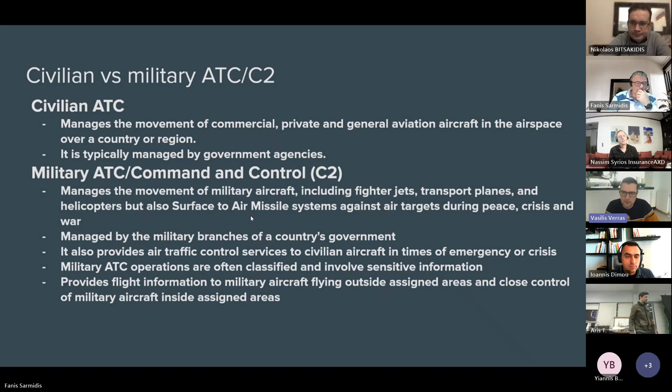When we had military aircraft under control on a frequency, our concern was that they fly safely to the assigned area to conduct the exercise, and that once fully under control, they do not violate the block altitudes they were assigned, nor the 2D borders of the area. So they didn't go out of the area, and they didn't approach military traffic in the vicinity. We were always giving them directions, bearing, range and distance to civilian traffic flying around, so they could establish radar contact with their own radars, or visual contact if possible.

Now, the flight phases. From the pushback of the aircraft from the gate of the airport, to parking at the next gate at the other airport that could be on the other side of the world, we have basically three phases and three types of controllers that control a flight.

We have the tower controller, which is the person that provides the service in the vicinity of an airport or aerodrome. The tower controller also controls the aircraft on the ground and until takeoff. Then the approach controller, or departure controller, is the person that provides air traffic control for departing and arriving flights. They are the link between the tower and the area controllers.

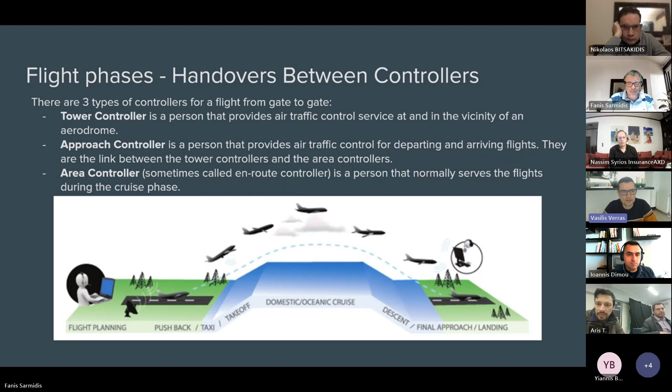So, ground systems — what do we use in ATC to actually communicate with the aircraft, to visualize their trajectory, to see where they are, and to see who they are?

Typically we have sensors: radars, primary radars, secondary radars, and other types of sensors able to detect an aircraft. We have two basic types: cooperative and non-cooperative. Cooperative types are like secondary surveillance radars, which interrogate an aircraft for a specific IFF-SIF mode. The IFF-SIF modes used by civilians are 3 Alpha, 3 Charlie, and Mode S. The IFF-SIF modes 1, 2, 4 and 5 are used by the military.

Then we have Automatic Dependent Surveillance Broadcast, or ADS-B for short, which is a system used by the aircraft. It's not like the IFF-SIF, where the radar needs to interrogate the target — it is a continuous transmission of data from the aircraft, where various information about the flight, like speed, heading, altitude, and position, plus settings like the selected altitude in the autopilot or even the vertical rate of the aircraft, are exchanged.

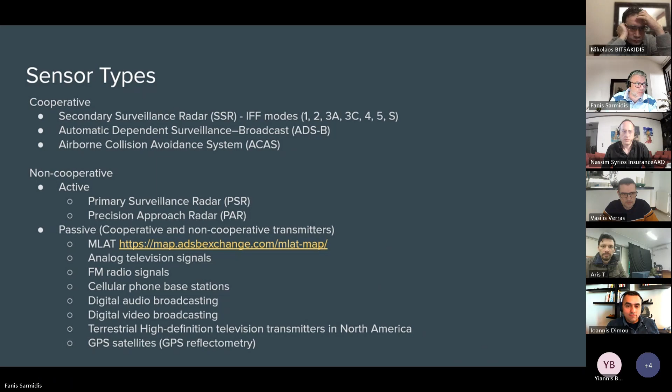So a little bit about the IFF. It works at the 1030 and 1090 megahertz frequencies. It is not a range, it uses these two specific frequencies. As I said before, for civilian usage, typically it contains mode 3 and mode Charlie. Also, it contains mode S.

We also have nowadays the IFF emergency codes that the pilot can set: 7500 for hijacking, 7600 for loss of communication, and 7700 for general emergency. We also have, though it's not very common, 7400, which is used for the loss of communication of drones.

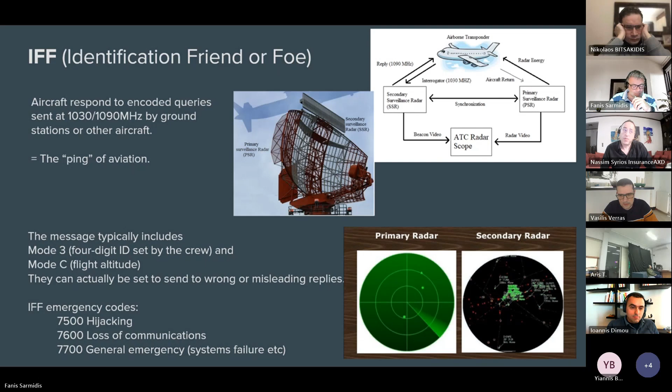So how do we create tracks, and what is a track and what is a plot? A plot is a target report that results from digital integration of the received echoes or replies inside the antenna beamwidth. Normally, when a radar scans the area, it gets back a signal from the aircraft, either the reflected signal from its own radar in the case of PSR, or the reply of the IFF SIF equipment of the aircraft in case of an IFF interrogation.

What is determined by the signal is the azimuth, the distance, and also the altitude if it is a 3D radar. This is basically what a plot is: a piece of information that contains the time of detection of a flying object with its azimuth, its range, and its altitude from the sensor. Of course it contains more information, especially on SSR replies, like the IFF SIF modes, mode S, and other information.

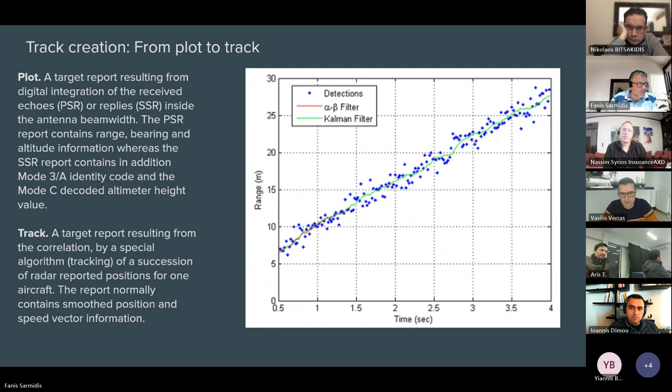Multilateration is a different technology. It's non-cooperative, and it calculates the time difference of arrival, basically of a signal from multiple sensors. Typically we need more than three sensors, four or more, to perform multilateration, and they need to be very well time synchronized.

For each detection there is an area of probability where the target is, based on the time of arrival. If you combine all these areas together, you get the common area which identifies the place where the aircraft is flying.

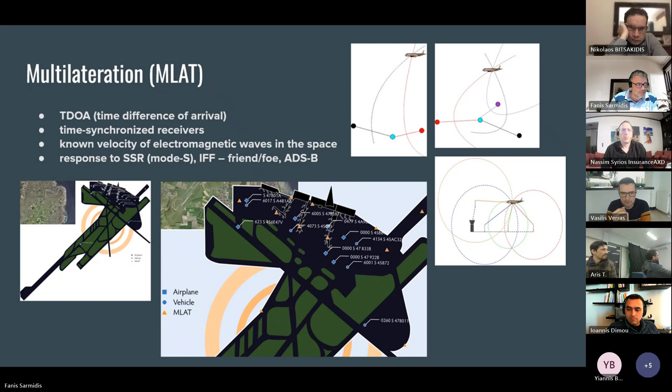All these signals end up in the air traffic control center, and we use specific protocols to convey plot information. Nowadays the most common ones are the Asterix family of protocols. We use categories 1 and 2, and categories 19, 20 and 21.

Category 1 and 2 is a plot type category, the old one. Category 34 and 48 is a successor category for plots. Category 20 is the multilateration category, 21 is the ADSB category, and 19 is the service category for multilateration, which gives you extra information about how the targets in the multilateration were produced, from which sensors and so on.

Category 62 is a track category, used by ATC systems to exchange initiated tracks with each other. These categories are also used by the military, I'll talk about it later.

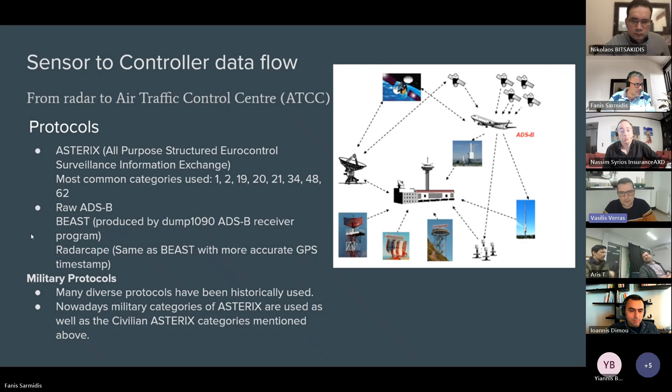It goes without saying that if you get a bunch of information without any label on it, it is more difficult to see how many aircraft you have and which plot belongs to which track than it is when you have the same information but with call signs.

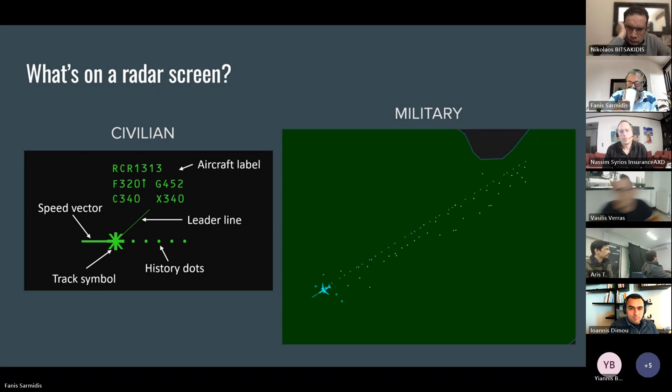Thank you very much. Yep. So we're going to talk about the onboard systems. I'm going to talk to you about that part. Before we move on to the onboard system, a small clarification.

The basic job of a tracker, in case this was not obvious, is to effectively correlate the raw information, and instead of having many different blips on the screen, to indicate that these all belong to a single aircraft and maintain a track over time. So to continue tracking the blip from the previous cycle to the next, so that controllers don't have a lot of noise and ambiguity in what they see.

Fanis, shall I present, or will you show my slides? Okay, let's talk about the onboard system. I can do it for you, or you can take over if you like. Okay, you do it if that's okay. All right, all right. So, onboard systems.

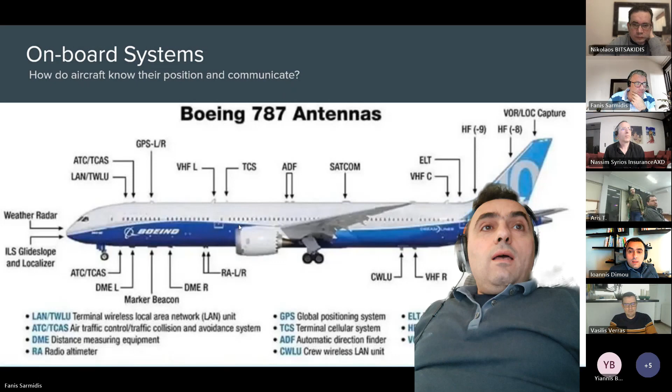Now, this is more or less for airplanes. For helicopters, we have a similar set of systems. Their positions also follow the same rules. You will find VHF antennas, both top and bottom, to ensure good transmission and reception. You will find automatic direction finders and VOR DME antennas to assist with navigation. And also in the belly of the helicopter you will see the transponder, the IFF antenna.

As Vassilis already spoke about, this helicopter will respond to queries from a radar station about its ID, altitude, and speed. There is also an antenna on top of the cockpit for the emergency transponder. Usually these systems have antennas at the top of the aircraft because it is the last part to sink. We want to maximize the probability that it will continue to emit even if it ditches in the sea. Now, moving on, next slide please, Fanis.

The first set of systems is the navigation systems. First of all, you need to know where you are before you can communicate it to the controllers on the ground. Traditionally, we have had multiple generations of such systems, and the important thing to remember is that at any given point in time, you have many generations of aircraft flying around. You have machines built in the 60s, in the 80s, mixed with airplanes built in 2023, for example.

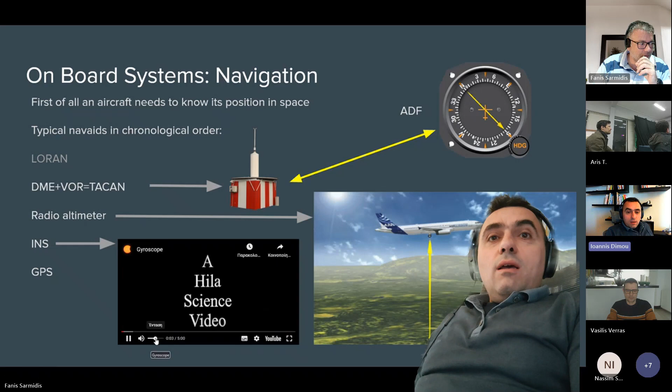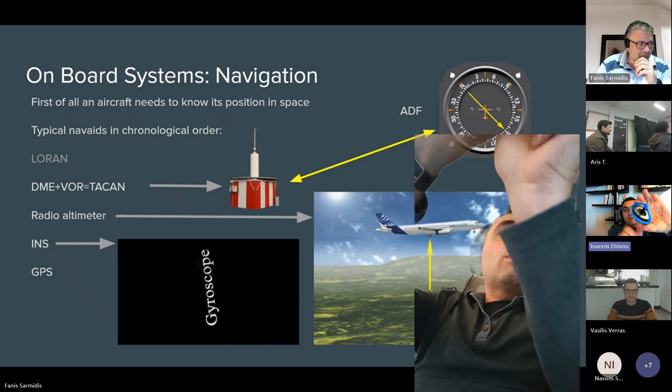Now, in terms of the most modern systems, INS is what we used to have since the 1960s and 1970s. It is basically a gyro, like the one I have here. This is a pretty ancient mechanism that, if you turn it at high speed using a string or an electrical motor, tends to maintain its attitude. So the point is that no matter how the plane turns, if you have a gyro installed, you can always determine which way it is facing.

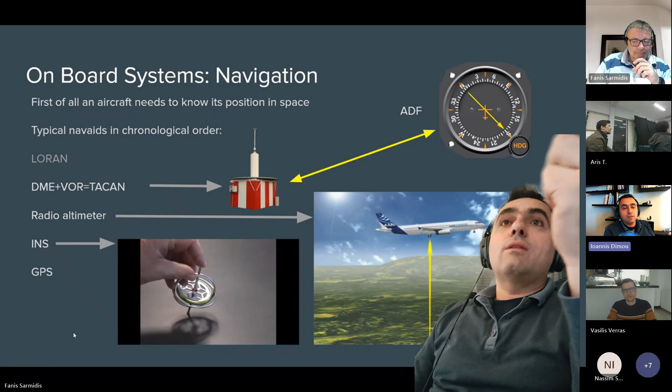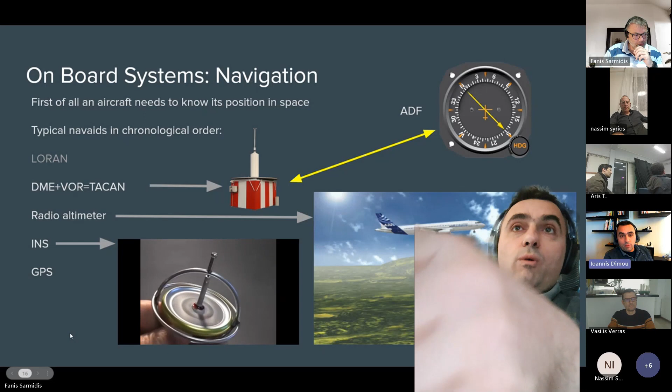Gyros can also measure acceleration very precisely. If you calculate the integral of acceleration, you get the exact speed. If you calculate the integral of speed, you get the displacement. So by constructing very precise gyros and good analog integrators - since most planes from the 60s and 70s had analog computers - you can calculate where the plane is in space, how much it is accelerating, and what its speed was at any given point in time, without the help of any external antennas or other equipment. This is the benefit of an inertial navigation system.

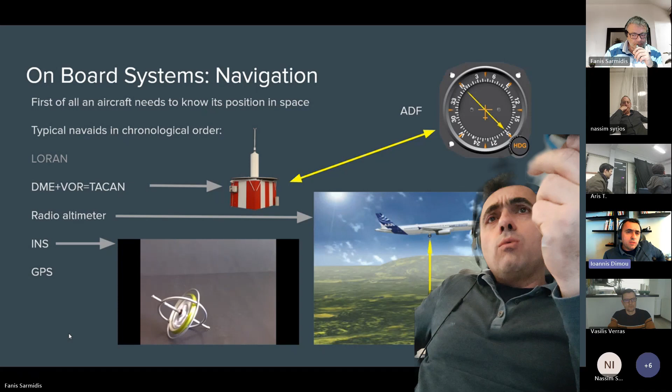The drawback is that it drifts with time also, so the more you fly, its precision drops. But it is a pretty reliable system to fly multiple hours or thousands of miles and still get a decent reading. Modern inertial navigation systems don't rely on mechanical gyros anymore - they have laser gyros, effectively 3 laser beams perpendicular to each other, which measure the reflection on a small mirror and then determine the acceleration and attitude.

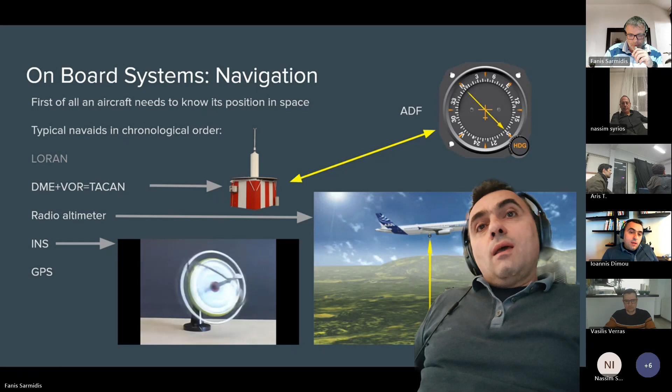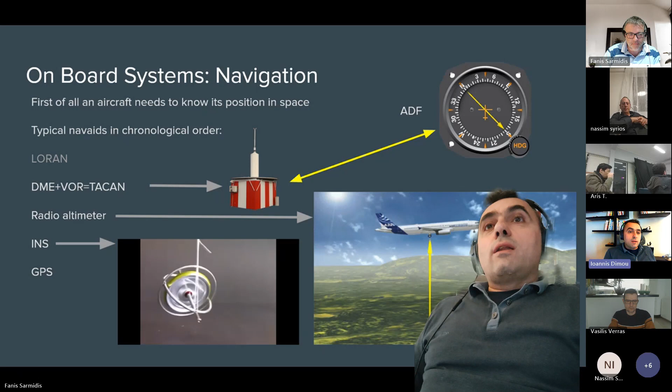Finally, we have GPS, which I don't need to explain in detail since we all use it in our phones and cars. The drawback of GPS navigation, which we don't notice often but which Fanis brought to my attention, is that there are places in the world where GPS is not reliable or not working well - probably deliberately, close to theaters of military conflict or in countries which do not have good infrastructure or reception.

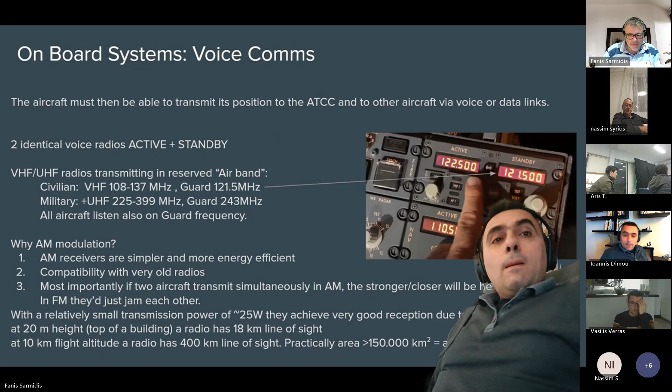Now that we've sorted out how you could communicate using voice, the natural evolution was to switch to data communications.

Data communications is when the aircraft can transmit a pulse train, a digitally modulated signal, which contains some essential information. One such system, which Fanis is going to demonstrate to us next, is the Automatic Dependent Surveillance Broadcast, ADSB, which transmits periodically at 1090 megahertz a small set of key information about the aircraft and the flight. There you can find a standard unique key, a hex ID, the call sign, the registration of the plane - essentially its license plate, what you see painted on the fuselage - its type, the IFF code, shown as squawk code here, and then some basic information about where it is and where it's flying to and at what speed, and also some basic measurements for the wind as measured by the aircraft's instruments.

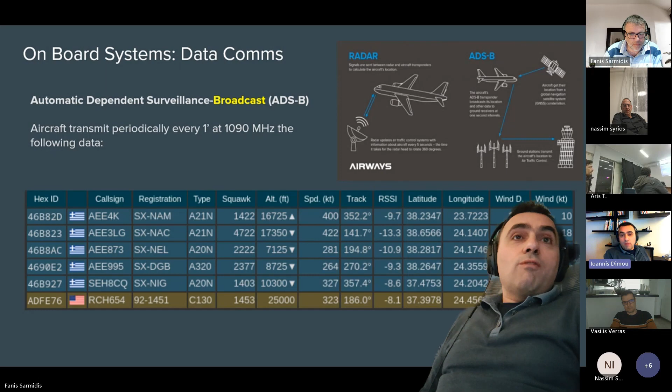One thing to remember is that an airplane is not always facing the way it's flying. Depending on the direction and speed of the wind, an airplane could actually be flying sideways at a high angle.

Speaking about data communications on board modern aircraft, another system we have is ACAS or TCAS, depending on which generation is installed and if you're in Europe or in the US. This is the aircraft collision avoidance system.

Effectively, this is a smart way to utilize information we already had. Since we have IFF information, since the planes already had transponders to receive and send IFF and ADSB information, somebody had the bright idea to save that information - not only maintain a single query, but store it in the airplane's computer and start running calculations.

If you have enough data from those two systems, then you can create a 3D map and start calculating trajectories of the various aircraft that have reported their position around you. Then you can predict collisions and alert the pilots to divert.

The way this system works, it defines three areas: the green one, pretty far away at 20 nautical miles; a closer one at 3.3 nautical miles, which corresponds to 40 seconds reaction time; and a really close one at 2 nautical miles, which is a little more than 25 seconds.

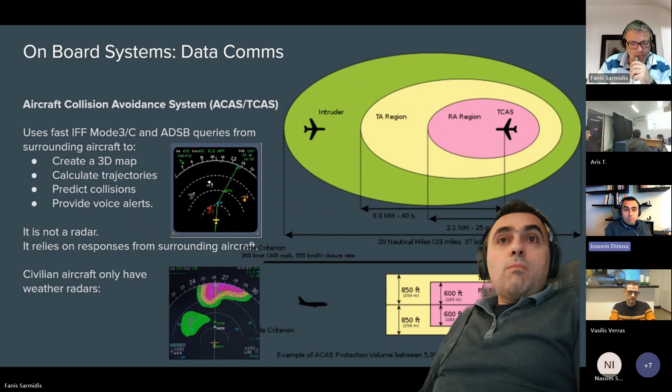As a side note, civilian aircraft don't have a radar capable of seeing other aircraft. All radars might appear similar to us, but there is actually a big difference in price if you want to distinguish small metal objects far away in the sky, versus if you just want to see a big storm in front of you. Most civilian aircraft have weather radars, which are there just to warn you of significant weather ahead that you need to avoid.

Now, moving on, another system of data communications on board the aircraft is ACARS. I know the name is very close to the previous system, but this one is called Aircraft Communications Addressing and Reporting System. You can think of it effectively as SMS capability for airplanes. It can send small text messages, either free text or formatted with specific data and format, using the existing VHF radios of the plane. It is used for a handful of basic scenarios.

First of all, it transmits automatically the key information about flight phases - when the plane pushes back from the gate, when it takes off, when it lands, and when it is back plugged into the gate. These are useful to determine departure and arrival times, the crew's salary, and overall maintenance and refueling windows.

It is also used to receive and transmit flight plans and weather. So if a plane needs to redirect mid-flight, it can send a flight plan by just typing into this multifunction display and sending a message to ground control. And it can receive weather updates through this screen.

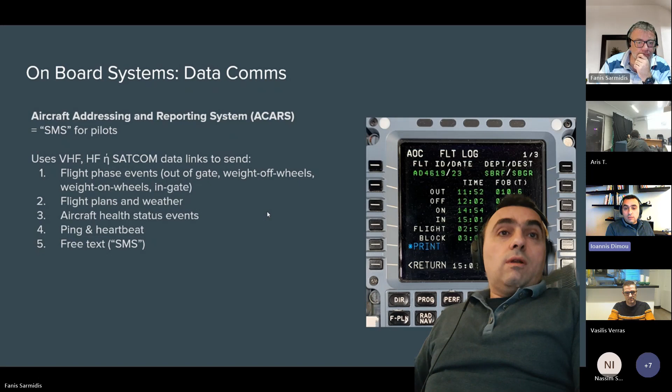Also, this system sends some small health information and events about the aircraft itself, and it can send ping and heartbeat information, letting the ground stations know every so many seconds that it is functional. Finally, it can send free text, and it's not uncommon for pilots to signal the arrival airport that they have, for example, a security issue on board, or a disturbing passenger, a drunk passenger, so that they need assistance on arrival - the police or an ambulance or something like that.

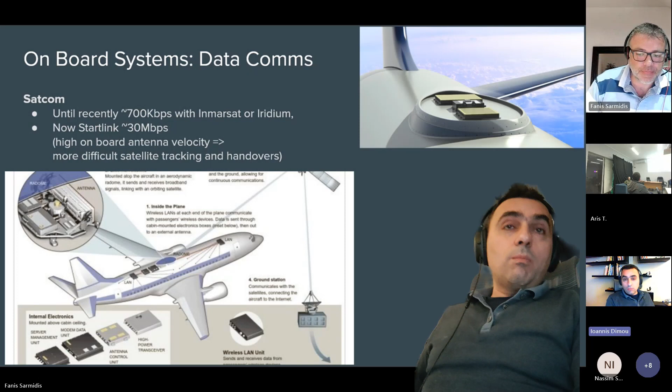Another form of data communication that aircraft have is the emergency transponders. Under normal conditions, they're not used, they're just tested, but they are very useful when things go south. They are automatically activated either in collision or in contact with water.

Ships also have these transponders installed at the bridge, because if the bridge takes on water, it means that the whole ship is already underwater. They transmit the position and ID of the craft that has an issue or that has crashed.

Firstly, to satellites at 406 megahertz. There are multiple satellite constellations, older and newer, that monitor these frequencies and forward this information, so the position and ID of the aircraft that crashed, to a national coordination center. This is usually called the Joint Rescue Coordination Center, and usually it is part of the Coast Guard or Navy of each country that has responsibility for search and rescue within its territorial area.

They also transmit to local search and rescue teams, like a helicopter that goes to search for a downed plane, on the standard guard frequency at VHF 121.5 megahertz.

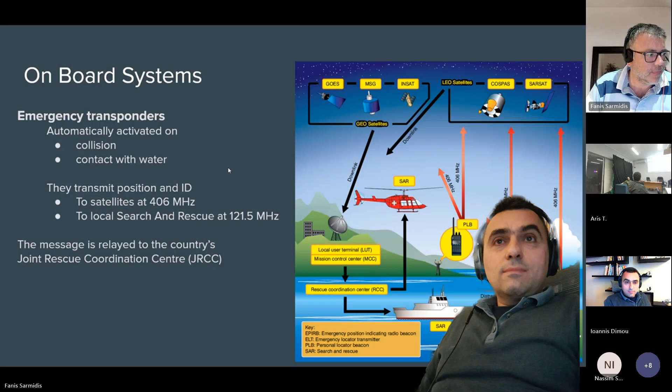Now, the last data communication system that I'm going to talk about is the engine diagnostic data links. I wasn't aware of this either, but it became pretty famous when the Malaysian Airlines MH370 flight went missing a few years ago. If you remember following the news, that story, we still haven't figured out what happened to that plane.

But most likely, one of the pilots was determined to commit suicide, and he had deliberately disabled all the communications on the plane. There is an easy way to do this: you just pull the circuit breakers, and this should work.

But what the pilot wasn't aware of is that the engine manufacturer had actually put global monitoring on board the engine. The reasons are multiple, so that they can collect a lot of information to improve their engines or to be proactive about maintenance when something goes wrong.

But effectively, if you're selling something that is so expensive - normal aircraft engines for airliners cost between 25 and 45 million apiece - then it is pretty cheap to install a small iridium modem right next to the engine fan and have it transmit information back to the manufacturer, no matter if the engine is flying, on the ground, or under maintenance. As long as it gets power, it will transmit.

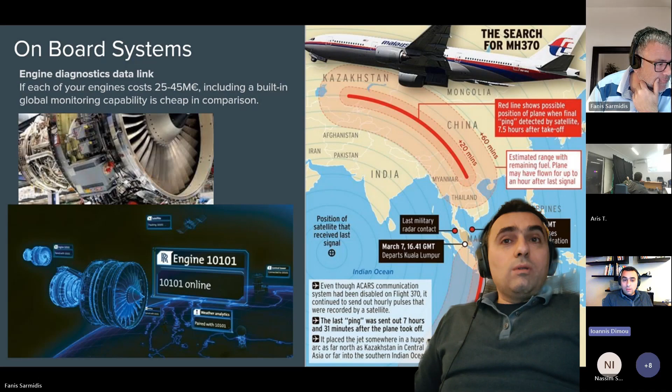Engine manufacturers nowadays are running global operation centers. For example, Rolls-Royce has one in Derby in the UK, where they monitor all the engines that they have sold through these systems. You can think of it as engines by themselves without aircraft, just reporting their vital data back to the maintenance facility.

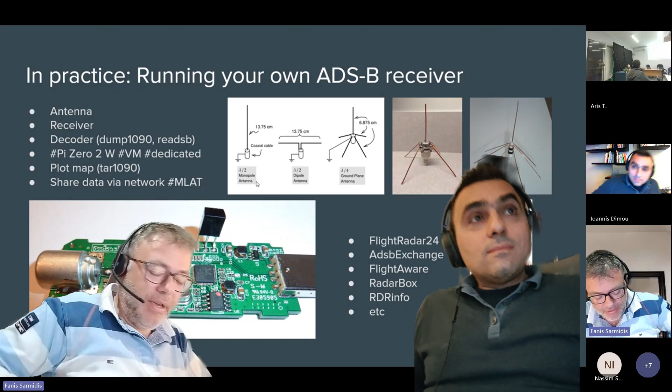Everything that we heard from the other two friends of us is very interesting - that's the theory. Now it's time for us to see some practical things that we can do and how we can receive all these signals.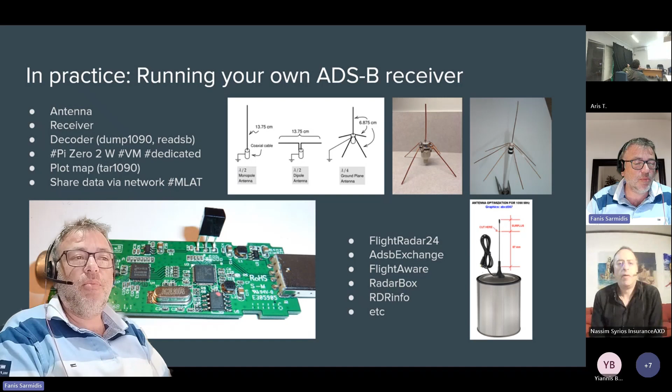Using an SDR receiver, normally a USB dongle, like the one we see in the presentation - the only thing we're missing is an antenna, which we can effectively create by ourselves. I have some simple diagrams on top of the presentation that everyone in our group can do in their spare time. Of course, you can buy a ready-built antenna and have a better reception, but one of these antennas can do the job for you.

With the SDR receiver, the next thing that we need is the decoder. The decoder is a software that we're going to use that will decode the signal we receive from the airplanes.

Normally, the two most famous decoders used, which are open source and available on GitHub, are Dump1090 and ReadSB. Both work very well. Some prefer one over the other, but it really doesn't matter which one you use.

The decoder can run on any software, whether you have Linux, Windows, or Mac. People prefer Linux because it's free and easier to install on. Many Docker images are available from companies that you can use and run on a Docker station as well.

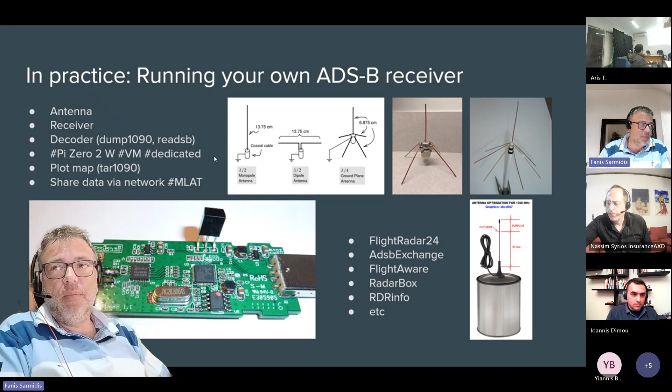You can receive the signal, and using multilateration on the big websites, or yourself if you have multiple receivers, you can pinpoint the location of the aircraft.

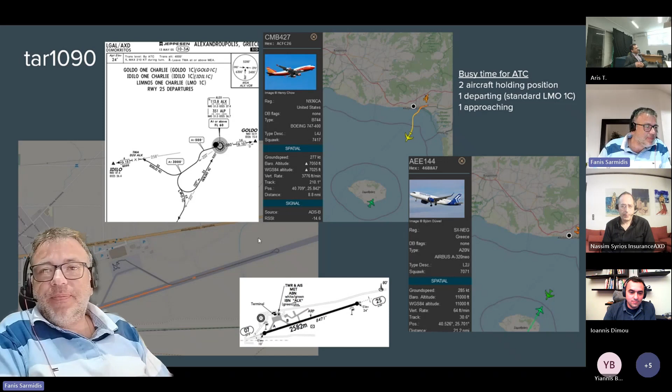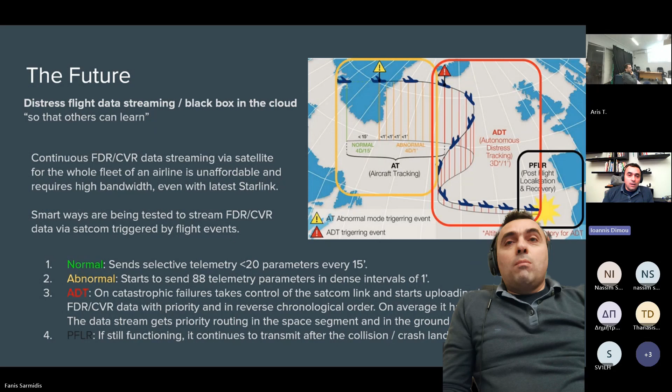Now, that can either succeed or send partial data. Once a plane is finally on the ground, either crashed or did a controlled crash landing, if the system is still functional and it has power, it is trying to transmit additional missing data, and also it transmits location information to assist with rescue efforts, much like the emergency transponders.

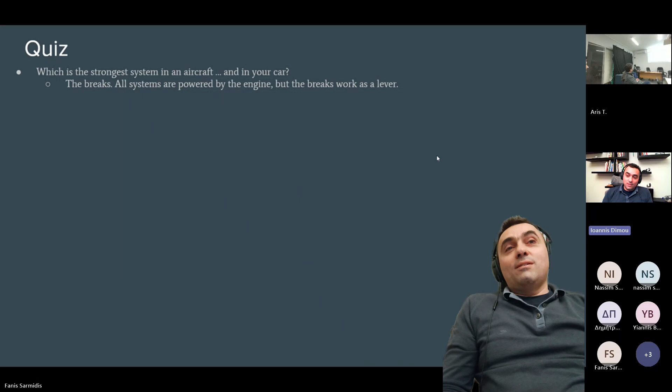Yes, so actually everybody thinks the engine is the strongest system, but the engine is just producing power. The brakes are the stronger system. Airplanes and cars can decelerate much quicker than they can accelerate, so it acts as a lever.

Next one, what color is an aircraft's black box?

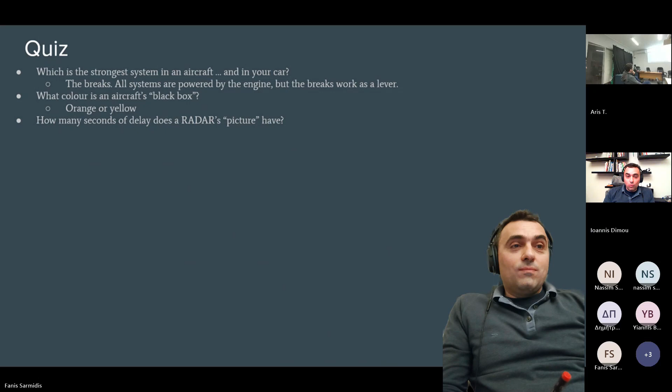Any ideas? So what you see, is it up to date or does it have some latency? It has latency.

Yes, normally it takes 12 seconds for a radar's antenna to complete a full rotation, but it doesn't have such huge latency comparatively speaking, because multiple radars track a single airplane most of the time. Especially in dense airspaces like Europe and Greece, it's not like being in the middle of the ocean where you have only a single radar from far away. Here, many radars see it.

Ari, I think I muted you. Can you unmute?

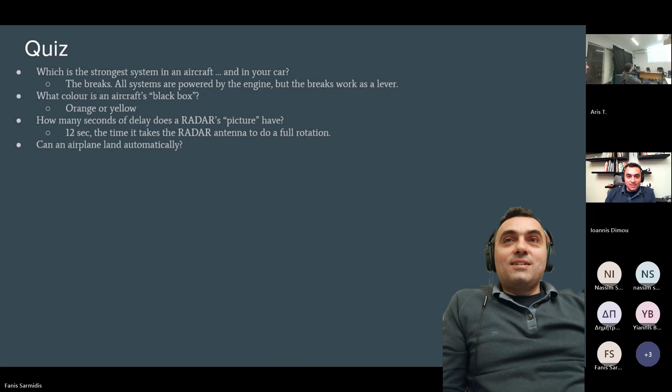Can an airplane land automatically? Of course, yes. This has actually been done since the 80s, but we're not using it widely. It requires an ILS-equipped airport, which less than half of airports have, but it is doable.

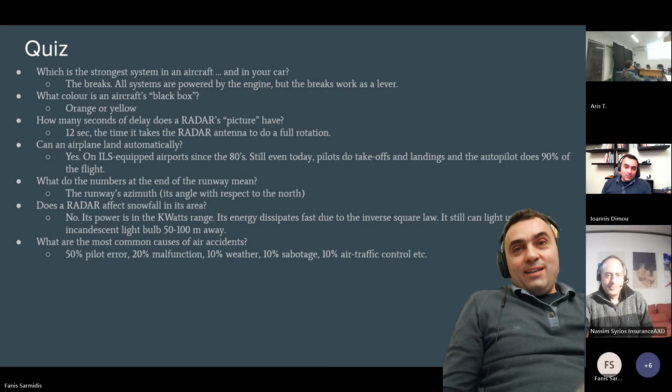Human mistake, human error. Yes. Malfunction, system failure, engine failure, wrong data. So the answer is 50% pilot error still, 20% malfunction like you said, 10% weather, 10% sabotage, which means bombs, hijackings, and all this nice stuff. 10% air traffic control issues, bad instructions, ground failures. By far, it is still human error.

Next one. What are aircraft's tires filled with? Foam? No. Anybody else?

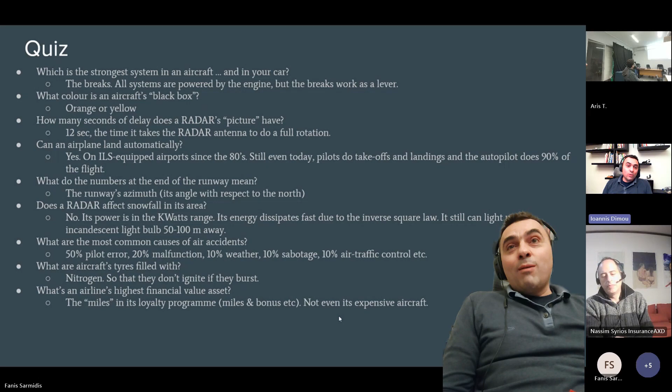And the airlines also have the capability to change the exchange rate in that currency, in their miles, at will. So one day they tell you a flight to Athens needs 8,000 miles, the next day you need 10,000 miles. Actually, they increased their capital by 20% without even telling anyone. So they basically operate as banks, and this is something that is not very well known.

Next one. What is the typical profit margin of an airline? How much percent? Zero, they make profit from the miles. That is also possible, yes. It is low, pretty low. 9%. For the risks that they take, this is a very low profit margin.

And last one: how much more than the co-pilot does an airline captain actually earn most of the time, on average? So you see two people flying the plane, but they are not the same at all. They just wear identical clothes. Any ideas?

2 to 4 times more. So on small island-hopping regional flights, the captain actually earns twice as much as the co-pilot. In long transatlantic flights, they can actually earn more than 4 times the co-pilot. This industry is very disproportional. The co-pilots are usually very much underpaid.

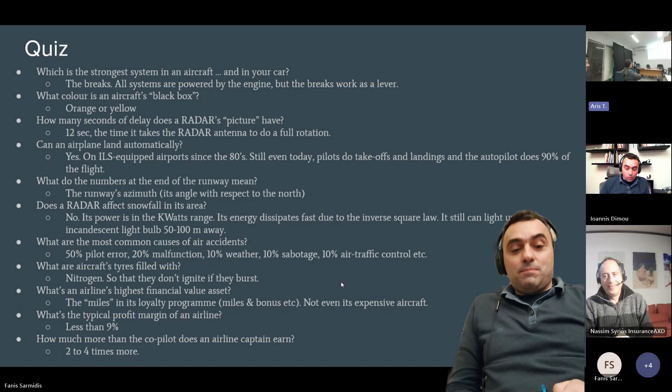Anyway, so that was all. It took quite a lot, but...